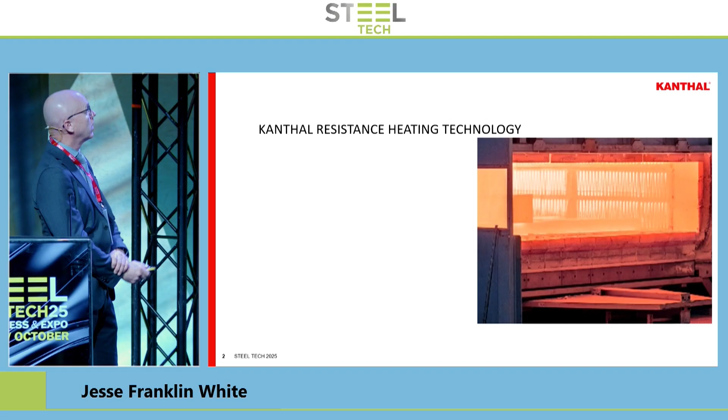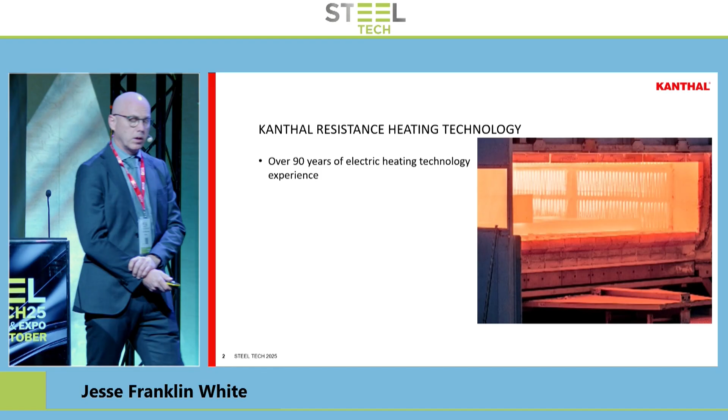Just a little bit about Kanthal resistance heating technology. Kanthal is an old company, about 90 years now I've been working on electric heating. So it's a well-established brand name and presence. We have about 9 production sites in the world: North America, Asia, and Europe.

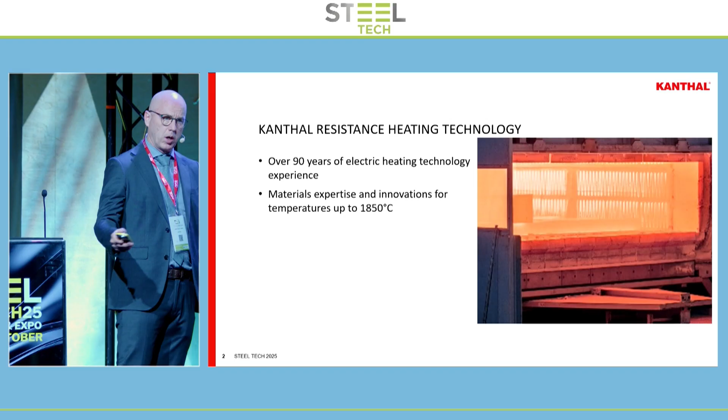We have a wide range of products that we serve. I'll say a little bit about that just to give you an overview. Up to about 1850 degrees centigrade with our ceramic materials. We offer complete heating solutions for a wide range of industries. I'll get into that a little bit, explain, not just steel and iron and steel making.

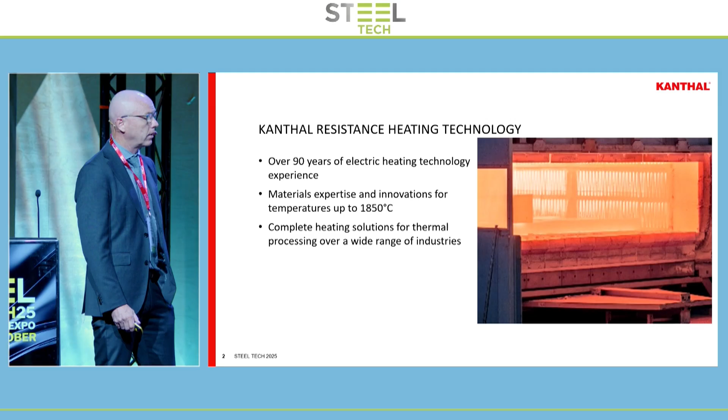Just an idea of the range. So we have metallic heating materials. Of course, nickel chromium is well known. Iron, chromium, aluminium alloys are a main part of our business. But also maybe lesser known silicon carbide heating elements that we produce. We have a plant in Perth in the UK. And then on the upper end of the temperature scale, we have molybdenum disilicide Kanthal super elements that are used in high temperature applications.

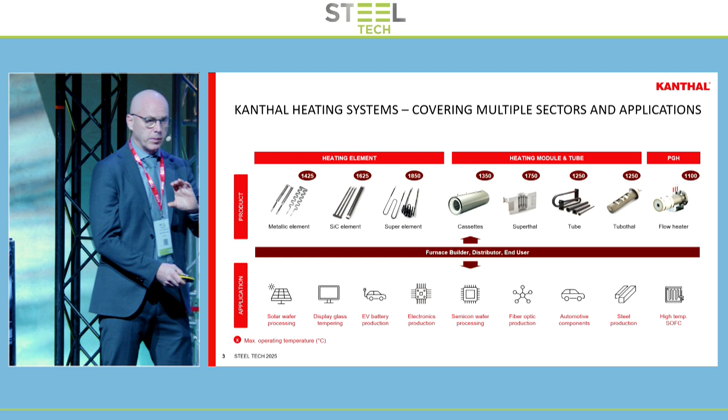On the heating module and tube side, we have several different types of products. We have what's called Superthal. We sell specialty tubes for different kinds of gas heating, electric heating. And on the other end, we have Tubothal, it's called. It's a heating element that's protected in an outer tube. And flow heaters, I'll talk a bit about that in a little bit.

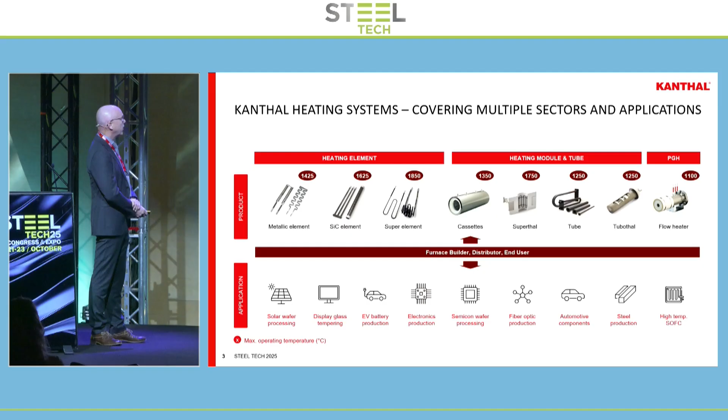We serve a whole wide range of industries, from furnace builders to end users. Not just steel making, as I mentioned. We have customers in solar wafer processing, semiconductors, glass industry is big, fiber optics, and then steel, which we'll delve into today.

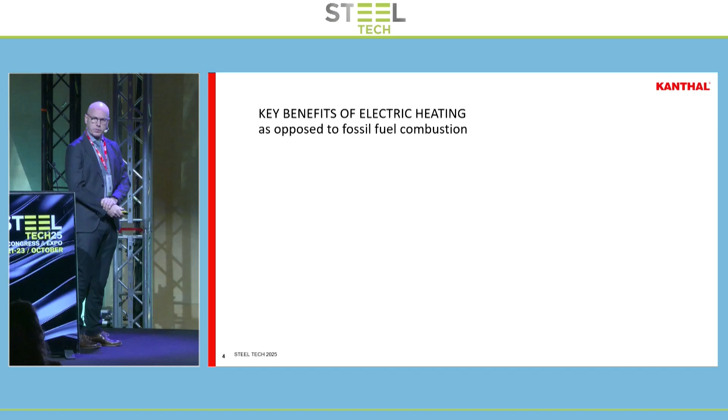To mention some what we feel and are key benefits to electric heating, and then from experience as well, I think it's good to point out the benefits. Well, firstly, we talk about CO2 emissions, of course. We have the potential with electric heating to significantly reduce CO2 emissions. And if you have renewable energy, like in Sweden, you can even get down to almost zero. And that's a big driver.

But maybe less discussed here is also elimination of other pollutants. We talk about NOx, SOx emissions from fossil fuel combustion is also something that one can reduce dramatically with electric heating.

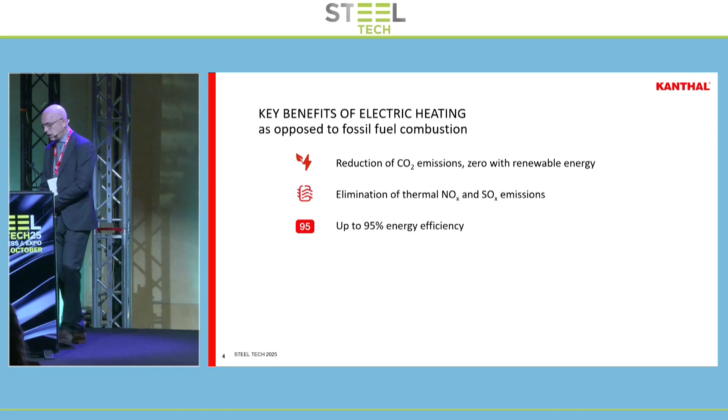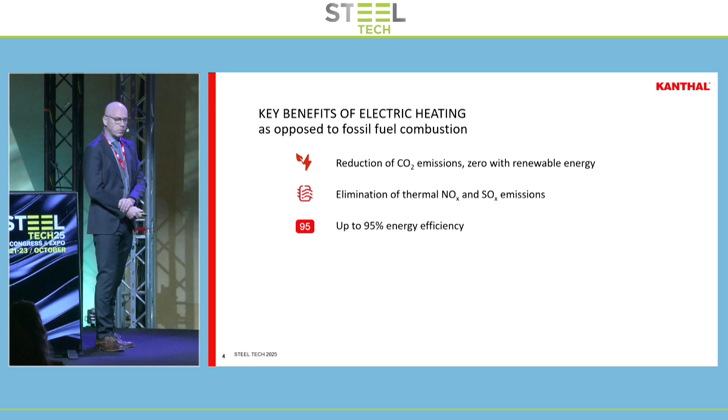Another key advantage we feel with electric heating is efficiency. In certain applications, you can get up to 95% energy efficiency. In particular, I talk about electric gas heating, which I'll talk in more detail about. That's a main advantage. You can reduce OPEX.

Another advantage, too, is temperature control. Certain applications require very precise temperature control. With electric heating, you're able to have a much more precise control of your energy input, and that's a major advantage.

Another maybe lesser known advantage is working environment. We see where we replace gas burners with electric heating that we significantly reduce, for example, ambient noise. So noise levels are reduced dramatically with electric heating. For example, in a ladle heater, which I'll talk about, you can hear the difference on the shop floor. It's much quieter with electric heating as opposed to burners, which have a lot of gas flow and noise.

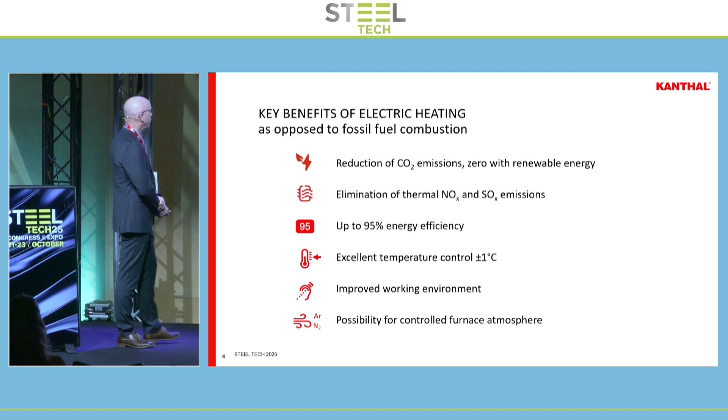And lastly, it's also possible with electric heating to have controlled atmosphere in a furnace. This could be an advantage where you want to have less oxidation, for example, on shapes, forms. So that's also an advantage we see certain customers are looking for that. So just to sum up, what we feel the key benefits of electric heating.

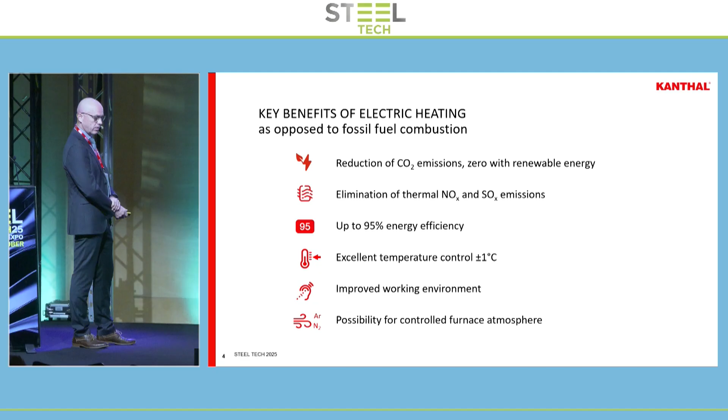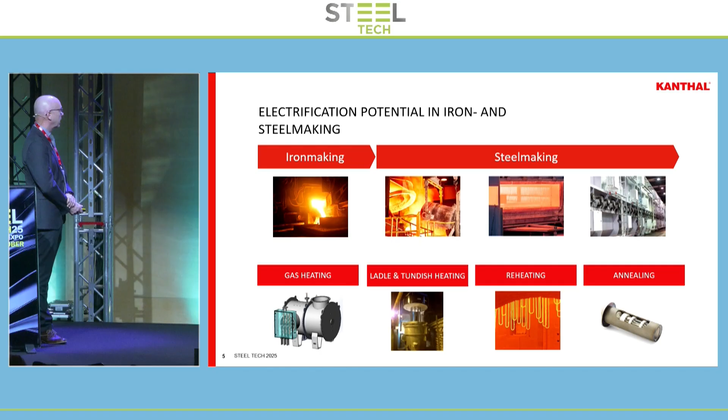To delve into more of the areas where we're working: developing electric heating technologies for steel making, iron and steel making, across the whole value chain, really, from iron making to reheating furnaces, for example. We have working on different areas here. We have gas heating, I'll talk about that last. This is a big area we're doing a lot of technological development at the moment.

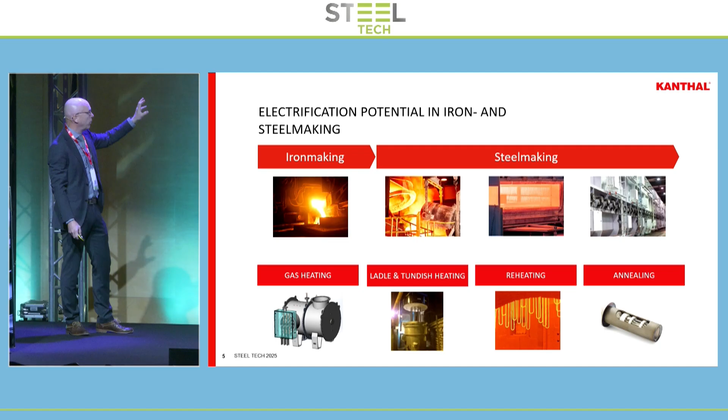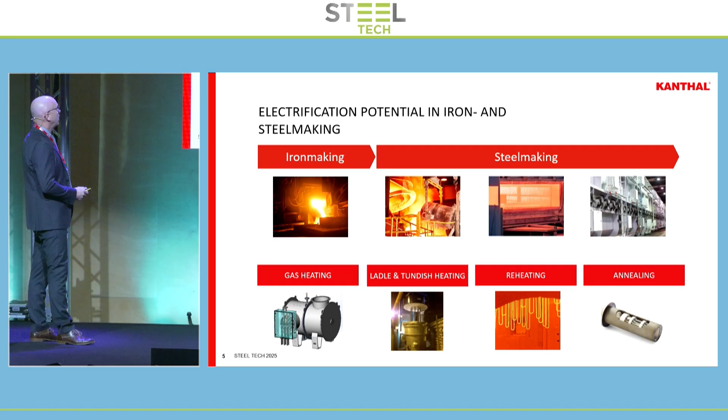And in these other areas where we're actually applying existing products that we have in retrofitting certain unit operations, for example, reheating and annealing. With ladle and tundish heating, it's more of a technological development as well. It's the scale up that's the challenge, from small ladles to very large ladles that are used in steel making operations. So ladle heating, we'll talk about that a little bit.

We've partnered up with a company called Sheba, and we're working together to develop complete turnkey ladle heating solutions to end users. Not just in steel making, it's before steel making. There's a lot of focus on aluminum industry. The smaller ladles are a little easier to build electric ladle heaters, but also foundries and other metals. The challenge there, and we're working on, is scaling up that, as I already mentioned.

Up to say greater than 100-ton ladles is a technological challenge that we're trying to meet, where you're using radiant heating to heat a big volume there. It may end up requiring a combination of radiant and convective heating in these applications. So we'll see how that evolves.

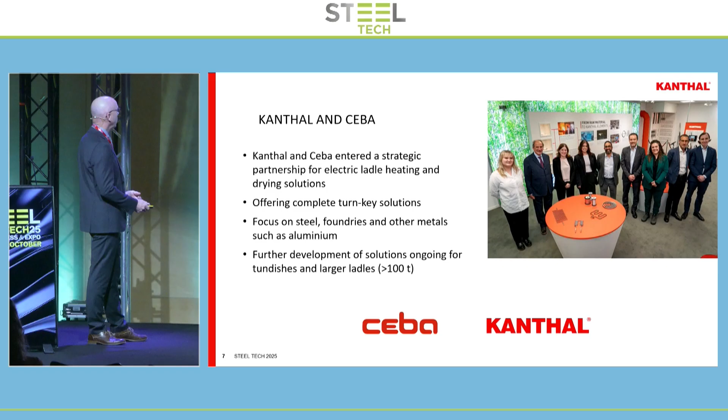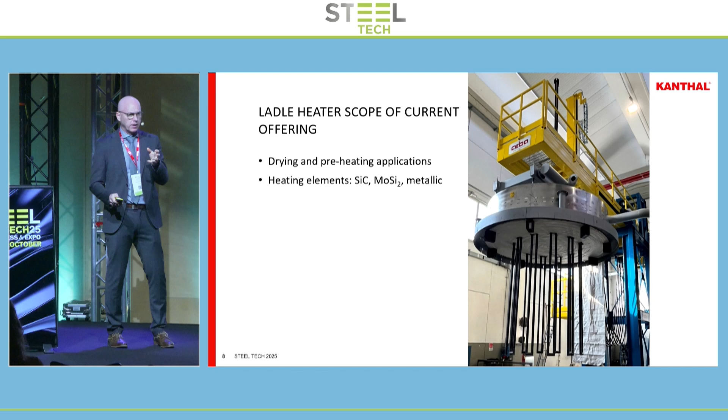Just to give you an idea of right now where we're at in development. Of course, for ladle heating, drying and preheating applications are the focus there. They can have different designs. We can use our range of heating elements that we have, silicon carbide and molybdenum being the most common there to use for ladle heating, but also metallic on the lower temperature range. Metallic heating elements can go up to about, say, 1200 degrees, where you can use a metallic heating element. Above that, you need ceramic materials, either silicon carbide or molybdenum.

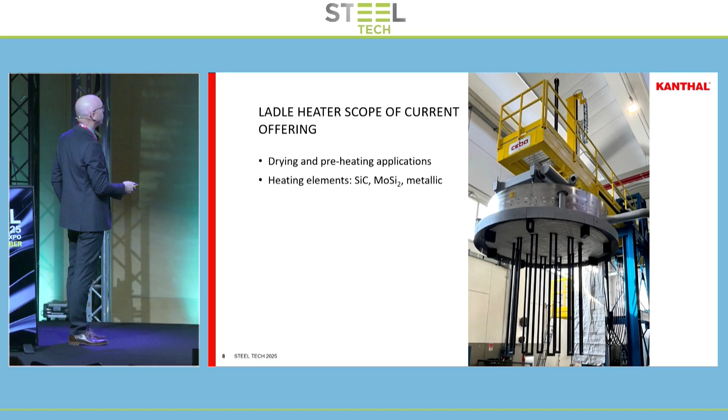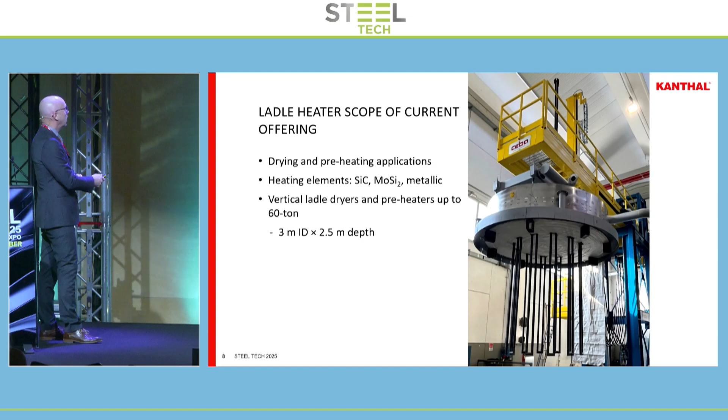So this is a picture of a unit we delivered together with Ceba, and you can see these are silicon carbide heating elements hanging down from the top lid there. So far, we developed and delivered preheaters up to about 60-ton ladle size. So it's going up in scale. We see a progress there, and looking at that, it's about a 3-meter inner diameter ladle, and pretty deep, so you say a max refractory temperature of about 1300 degrees there.

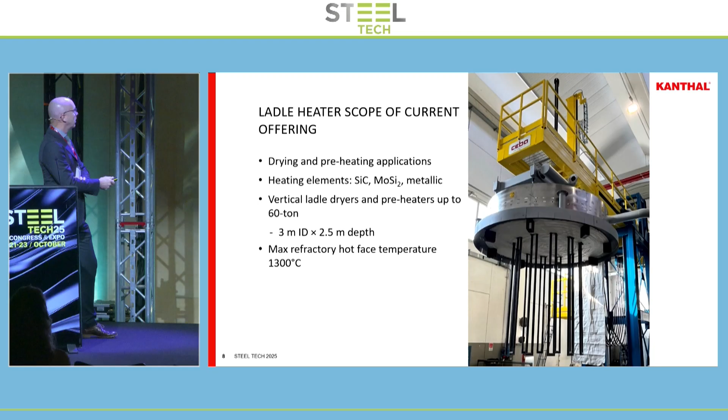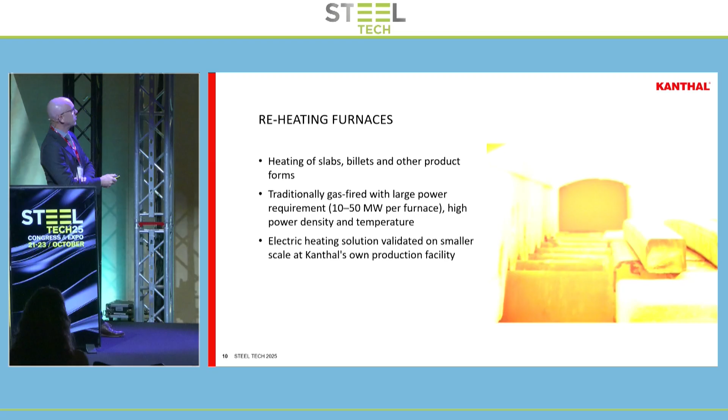I'll touch a little bit on reheating furnaces. That's also an area we're working on actively. Of course, it's a different challenge, a different type of heating required. Here you're heating slabs, billets, other forms. Traditionally, it's gas-fired. It's a high energy or high power size on these furnaces, 10 to 50 megawatts. A high power density and temperature, so it's a challenge from a technological standpoint.

So far, we've validated heating in this application in our own facilities at Kanthal. We have our own production facility in Hallstahammar, and I'll say a little bit about that.

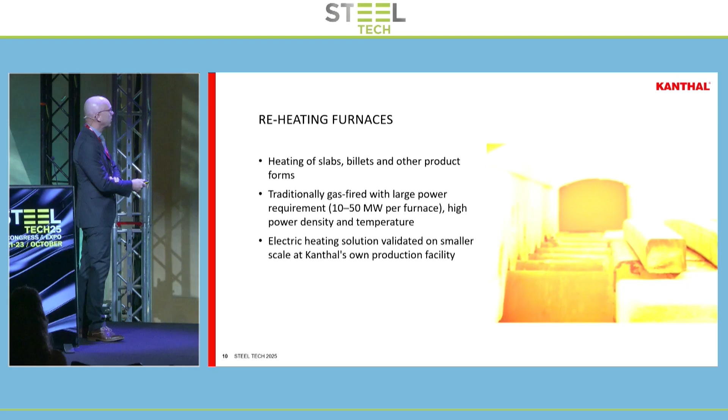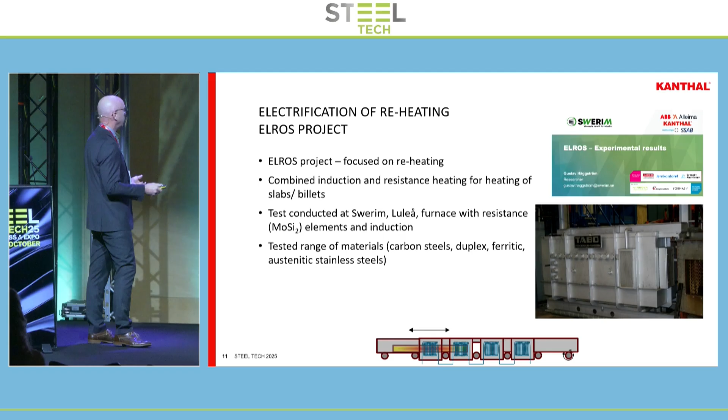But before that, as mentioned, this was a project that was done in Sweden, sponsored by Vinnova, with some other steel end users, being SSAB, for example. It's called the ELROS project. It focused on combining resistance heating with induction heating. An interesting project. The tests were done in Swerim and Luleå in northern Sweden, where we combined induction heating with resistance heating, and we tested a wide range of materials from carbon steels up to austenitic stainless steels to see how it worked. I won't go into too much detail, but some salient conclusions are that resistive heating has a lower energy use and it's suitable for a wide range of materials. That can be established.

Induction heating has its advantages for sure. It's certainly suitable if you want a fast production rate, a fast heating rate. Definitely induction has a clear advantage there, no doubt.

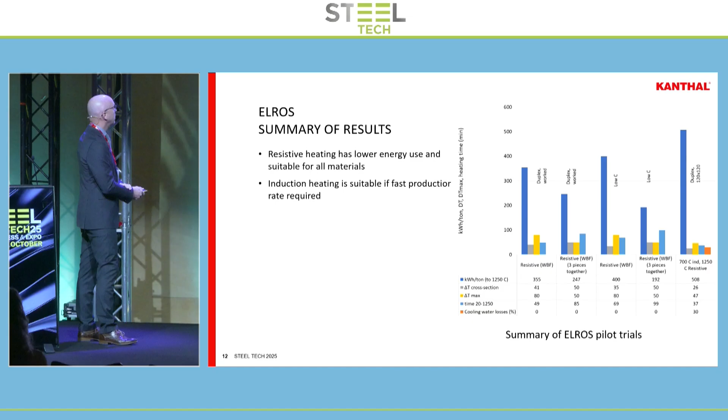Not as suitable, we found, for austenitic materials, where you take up that energy from the RF coil. But there are advantages to induction heating. Let's see here.

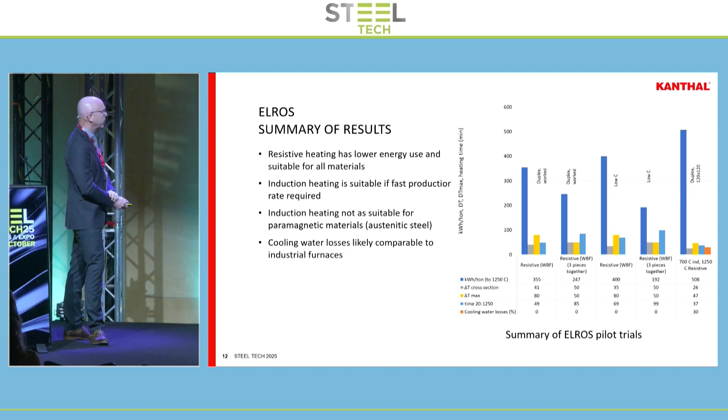One maybe drawback from induction heating is you have to have a cooled coil, and there's some energy losses involved there, so it's a little bit different energy balance than you have with resistance heating. But all in all, we show that resistance heating has good energy efficiency, even for reheating furnaces.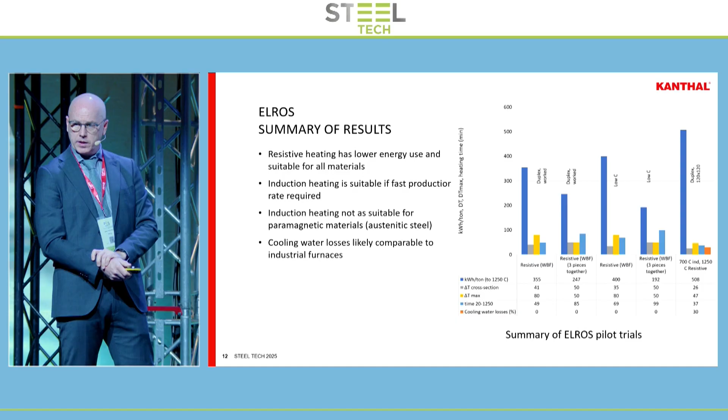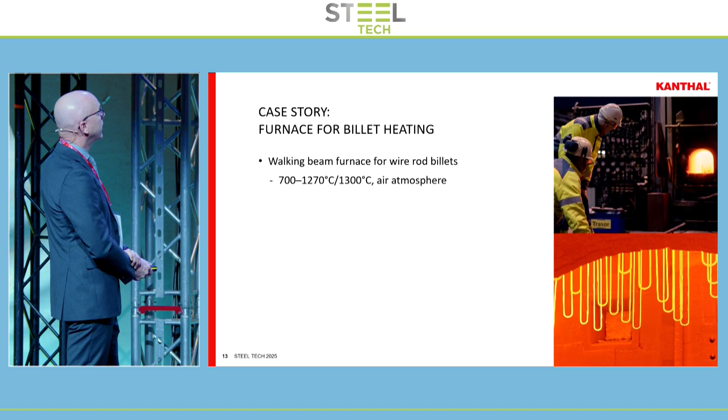Just a case story, a couple of case stories there. We have a furnace for billet heating at Kanthal, at our facility. We have a walking beam furnace there, up to about 1270 degrees centigrade with air. Billet size is, they're not large billets, and it's not a large furnace, but say 8 tons per hour.

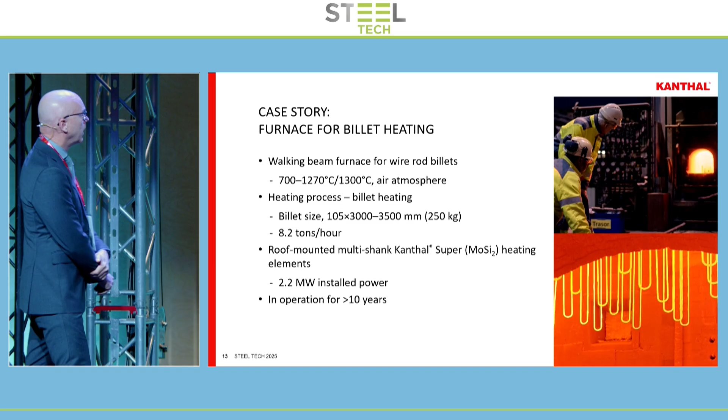It's about 2.2 megawatts installed power. As you can see from the picture here, it's hanging Kanthal Super Elements. We've had it in operation for over 10 years now, with great success. We found there are many advantages to going electric on this application.

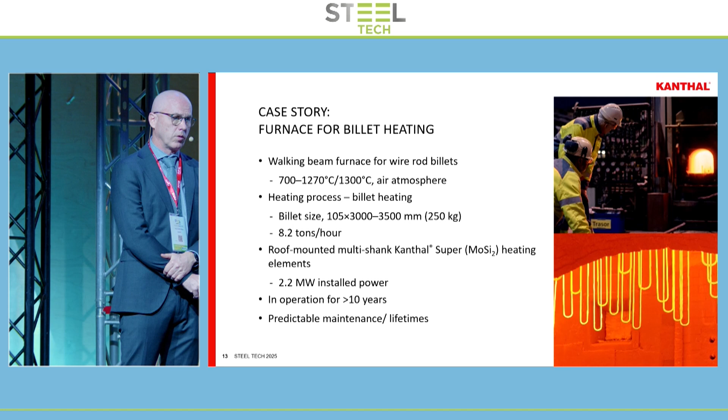One in particular, the predictable maintenance and lifetimes for the system. It's also very quiet, and it's been very stable. So we're pretty happy with that.

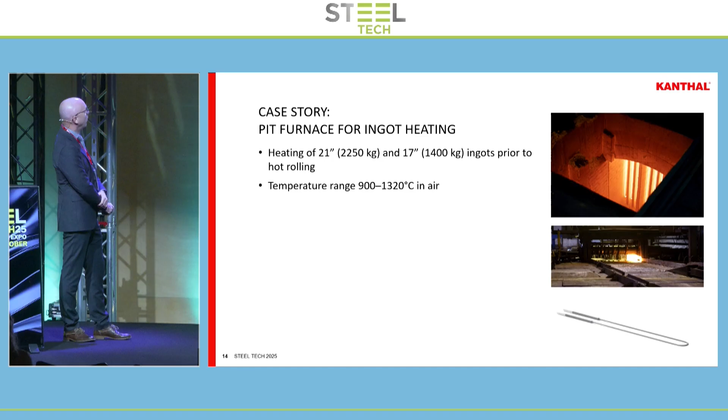Another case story is a pit furnace for ingot heating. We also installed here up to about 1320 using Kanthal Super Elements. We have about 9-ton charge weight. Works quite well. We've had it for several years.

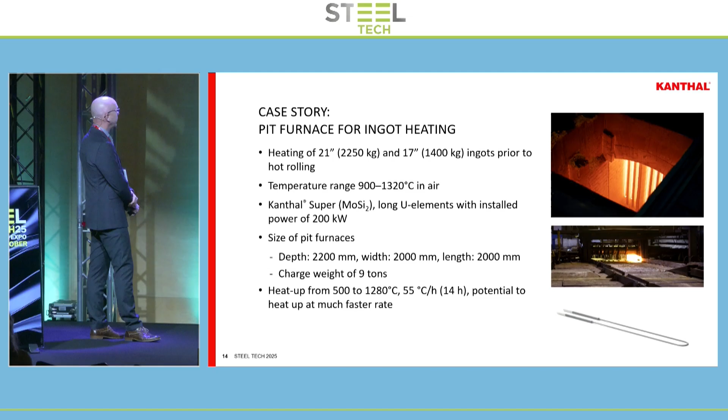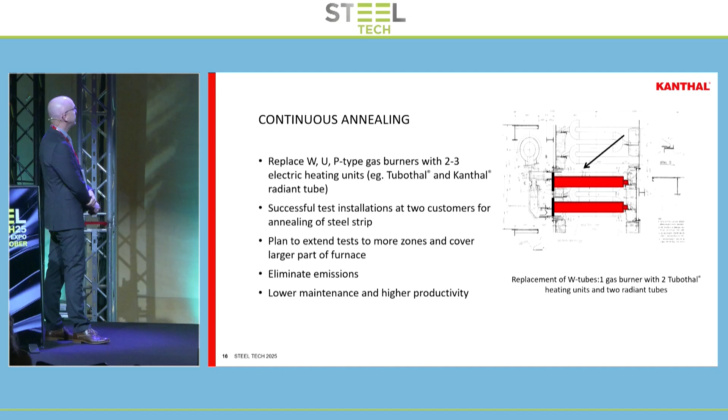Lastly, I'll talk about electric process gas heating. I think this is worth spending a little more time on. We're working actively here and putting a lot of effort into developing electrical gas heating. We have 3 technologies that we're developing in parallel.

We have a direct heating technology that has a very high energy density and a modular design. This is from the HYBRIT project, a spin-off actually. This type of technology has its advantages.

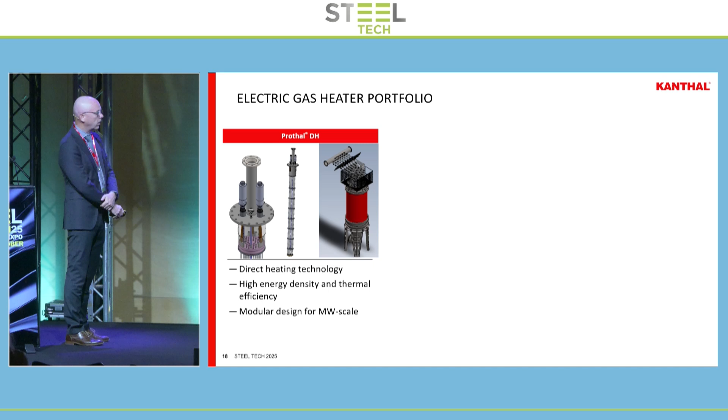We have an indirect heating technology we're also working on, where the heating elements are protected by a metallic barrier. Disadvantages with that, you have maybe a lower power density, but for particulate, it seems to work quite well when you have particulate in your system, where you don't get any accumulation on the heating elements themselves from particulate.

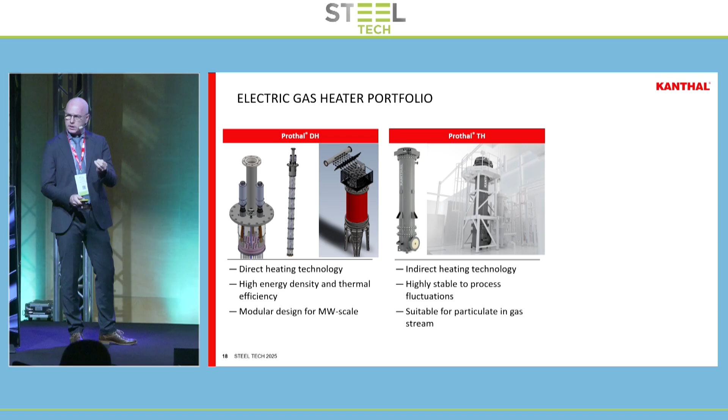We have one, Prothal FH, the last one here. It's also a direct heating technology. We've had this on the market for several years now, fairly small scale for steel making, but we're moving up to 1 megawatt in size here.

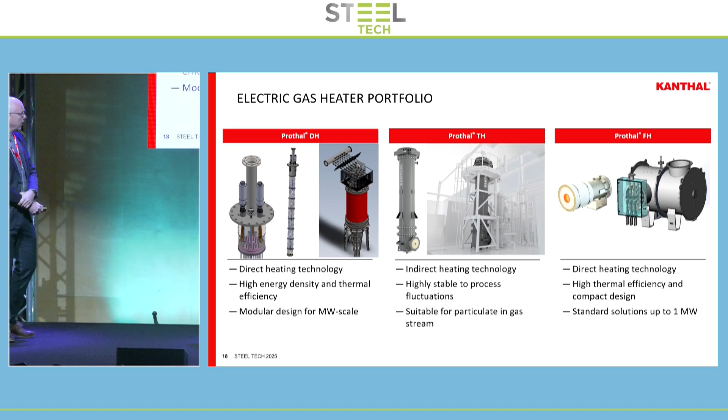And in comparison here, we're looking at DRI, I'll say a little bit about that. We have a strategic partnership with Danieli, working on this Prothal DH, the first one, direct heating technology. The objective there is to industrialize this DH technology for DRI. The focus is actually natural gas hydrogen mixtures, retrofitting, for example.

We feel there's a big market for converting plants. Danieli claims up to 30% of emissions can be reduced just by converting to electric heating of process gases. That's a pragmatic approach to reducing the CO2 footprint, instead of going pure hydrogen.

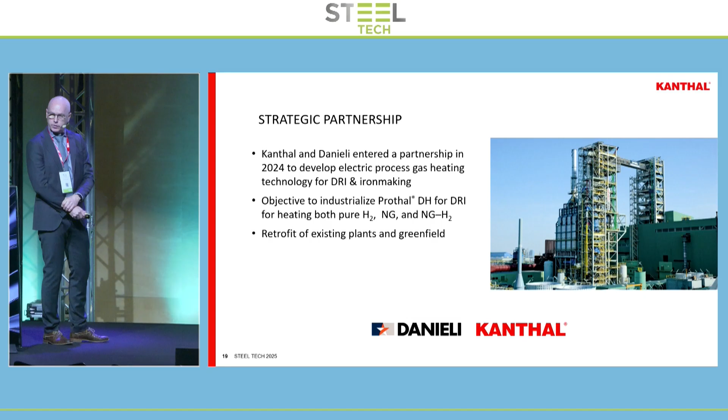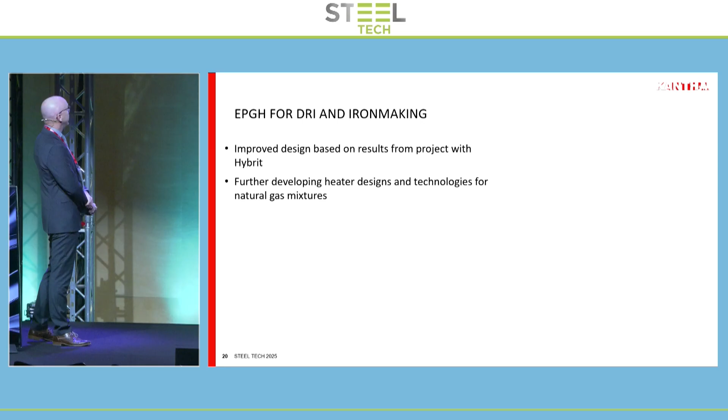Just some comments on further development. Yes, I talked about this being offspring from Hybrit. We're working on further development with Danieli on that. We have a test facility also at Swerim in Luleå, as you can see in the picture here.

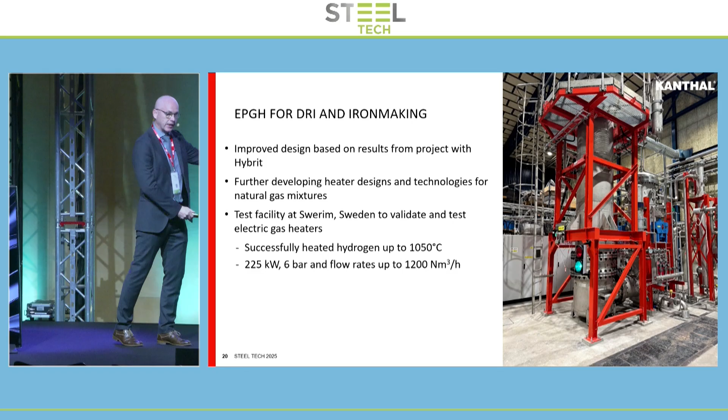We successfully heated hydrogen up to about 1050 degrees centigrade at 6 bar. It's a rather small system compared to what we endeavor to build, 225 kilowatts, but we have a recirculation system and can test our development of our heating technology.

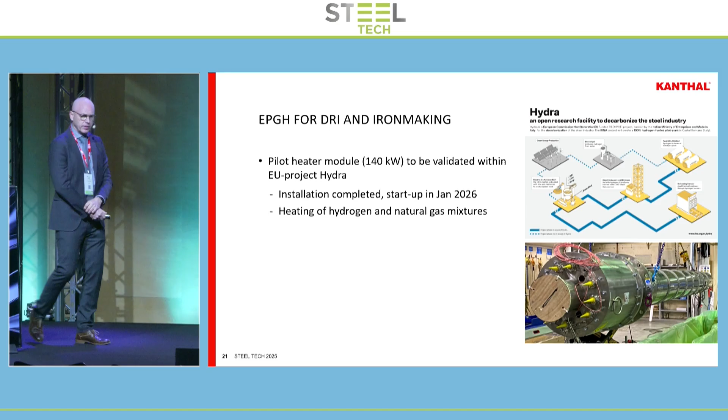Going on, we have a pilot heater module that's going to be installed. It's in alignment with the Hydra project, an EU project, also together with Danieli. That installation has been done and it'll start up in January 2026. Heating of hydrogen and natural gas mixtures is the effort there.

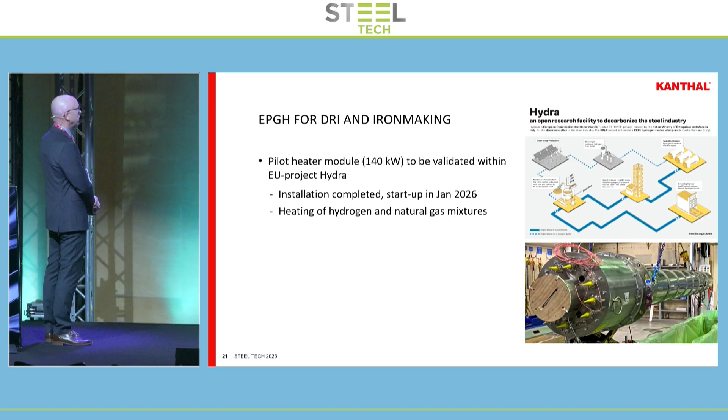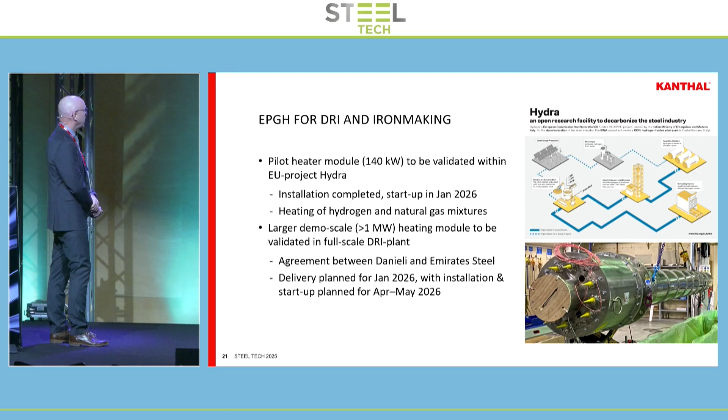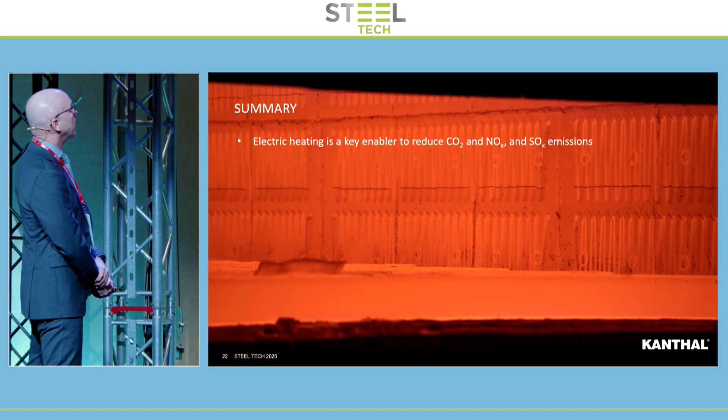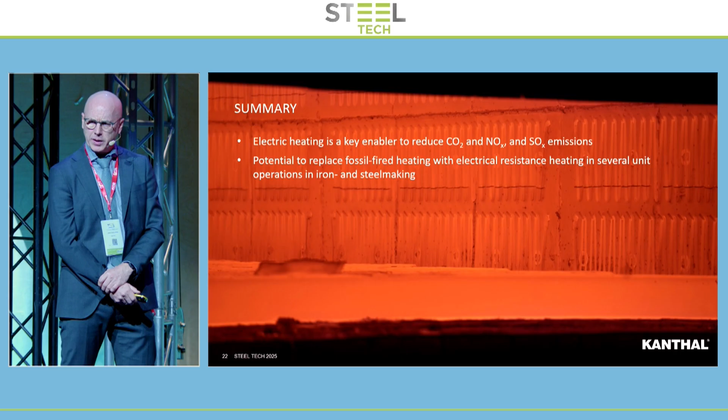Just to summarize, as I've discussed, electric heating is definitely a key enabler to reduce emissions, not just CO2, but NOx and SOx. There's good potential to replace fossil-fired heating in steel making and iron making for sure. Benefits, as I touched on, include efficiency, productivity, precise temperature control, and not the least, improved working environment.

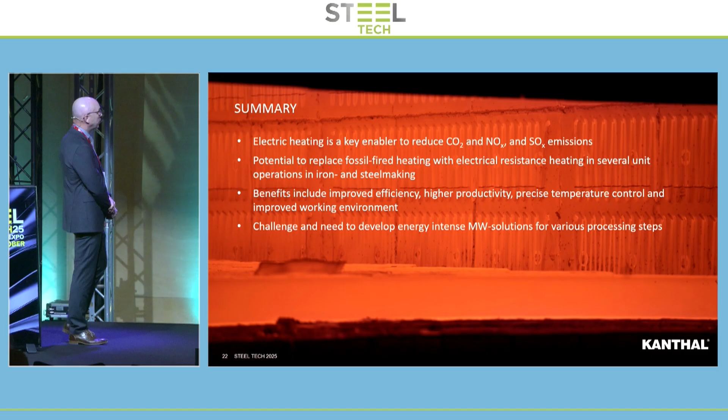There's a challenge. We have some challenges ahead of us. A need to develop energy-intense megawatt-sized solutions is a big challenge - how to scale these technologies up. At present, we're trying to do just that. We're trying to scale up, for example, with Danieli.

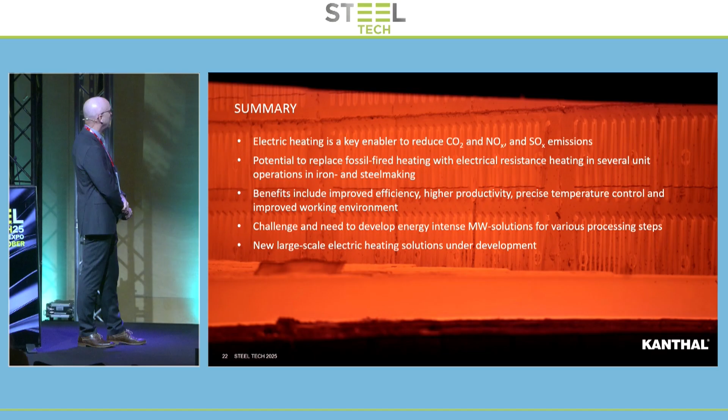So, thank you. Open for questions.

Mr. White, we have some questions for you. We have seen that there is a scalability problem with heating on ladles, but there is a smaller element you have not talked about - tundishes. Do you have any solution for electrical heating of tundishes?

Well, that's a great question. Yes, we do. We haven't worked on it as actively as with ladles. Our focus right now has been mostly on ladles, but yes, we're working on tundish heating solutions, electrical tundish heating solutions. So hopefully another time I'll be able to discuss more about that and describe what we're working on that side.

Thank you. From your experience at Kanthal, how can industry balance energy efficiency with the need for reliability and process stability when switching from fossil fuels to electric heating?

That's a good question. It's a complex answer maybe. We can see we have advantages, of course, with process efficiency with electric heating. I think there will be challenges, not only scale up, but also developing industrial robust solutions that last a long time and can take abuse. I think that's a big area.